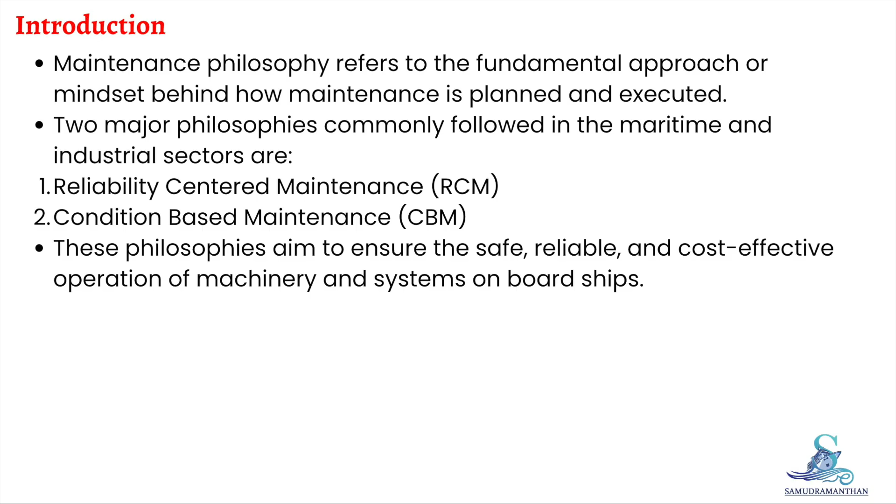In today's lecture, we will discuss two fundamental philosophies of maintenance: reliability centered maintenance, commonly known as RCM, and condition based maintenance or CBM. These two approaches form the backbone of modern maintenance strategies, especially in industries like marine engineering, where reliability and safety are absolutely critical. Let us begin by understanding what each of these philosophies mean and how they are applied in real world situations. Reliability centered maintenance.

Now, the philosophy of reliability centered maintenance or RCM was developed to ensure that maintenance decisions are made logically and systematically, focusing on the functions that equipment must perform rather than on the components themselves. RCM aims to achieve one major objective: to increase the probability that a machine or component will function reliably throughout its design life with minimum cost and maintenance effort.

The philosophy became especially important after catastrophic industrial incidents such as the Amoco Cadiz oil spill and the Piper Alpha explosion, which highlighted the need for comprehensive and effective maintenance systems. The core concept of RCM.

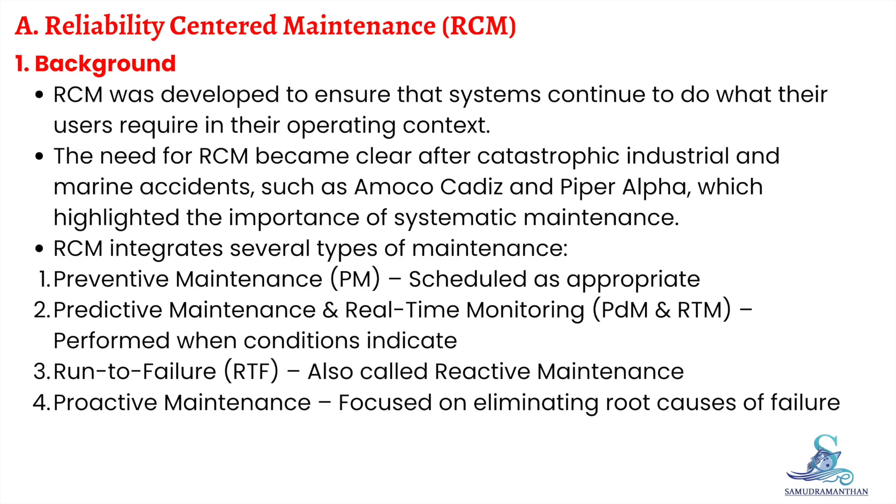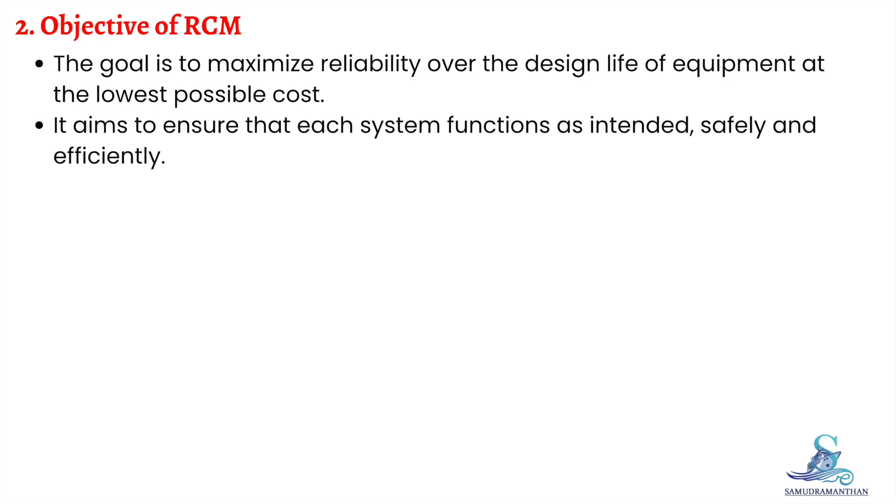RCM combines multiple maintenance techniques: preventive maintenance done at scheduled intervals, predictive maintenance and real-time monitoring performed when the equipment's condition indicates it's necessary, run to failure, also known as reactive maintenance, and proactive maintenance, which aims to prevent failures at root cause. So, RCM is not a single method, it's an integrated philosophy that uses different maintenance approaches intelligently based on the system's reliability requirements.

Key features of reliability centered maintenance. Let's now discuss the main principles that define RCM. Focuses on the function of the system. RCM aims to preserve the function of a system rather than just its parts. For example, on a ship, if a function is critical, such as propulsion or steering, redundancy is often built in. Multiple systems may be provided to perform the same function to ensure operational safety.

This aligns with the IMO ISM Code paragraph 10.3, which requires companies to identify critical equipment whose sudden failure could lead to hazardous situations. These systems must be regularly tested and maintained to promote reliability.

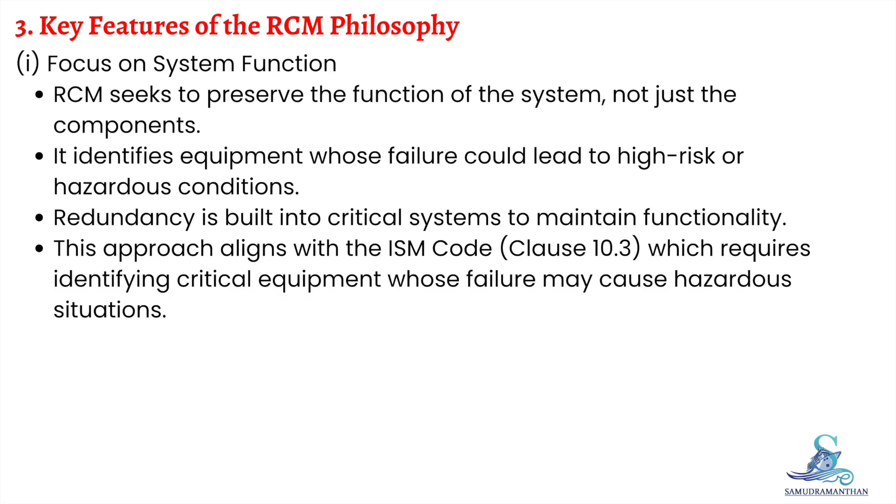It is reliability centered. RCM focuses on statistical data, analyzing failure trends over time. It does not worry about simple, low risk failures but rather concentrates on those that could cause major disruptions, safety risk, or economic loss. It determines maintenance intervals and tasks based on failure probability and risk assessment.

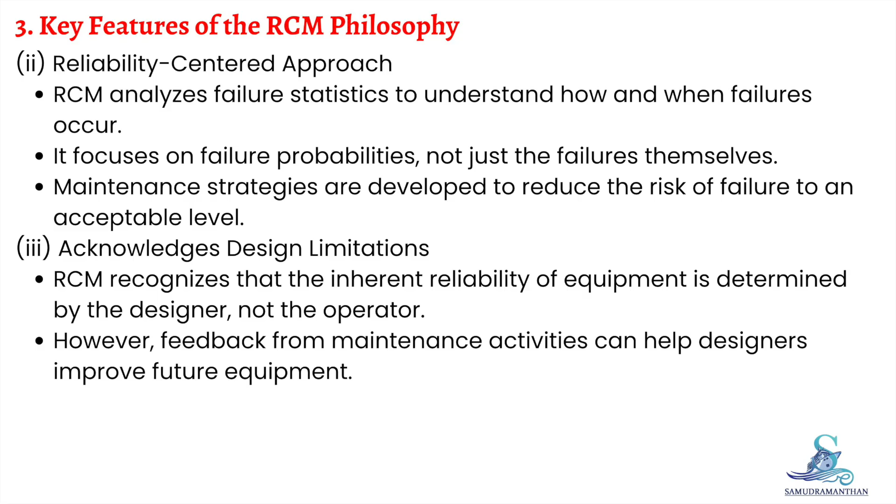Acknowledges design limitation. RCM recognizes that design determines inherent reliability. Operators and maintenance staff can't change a poor design, but they can provide valuable feedback to designers for improvement. So it builds a feedback loop between maintenance and design.

Driven by safety and economics. Safety always comes first in RCM, even before cost. Once safety is ensured, maintenance strategies are optimized to be cost effective. This balance makes RCM both practical and efficient.

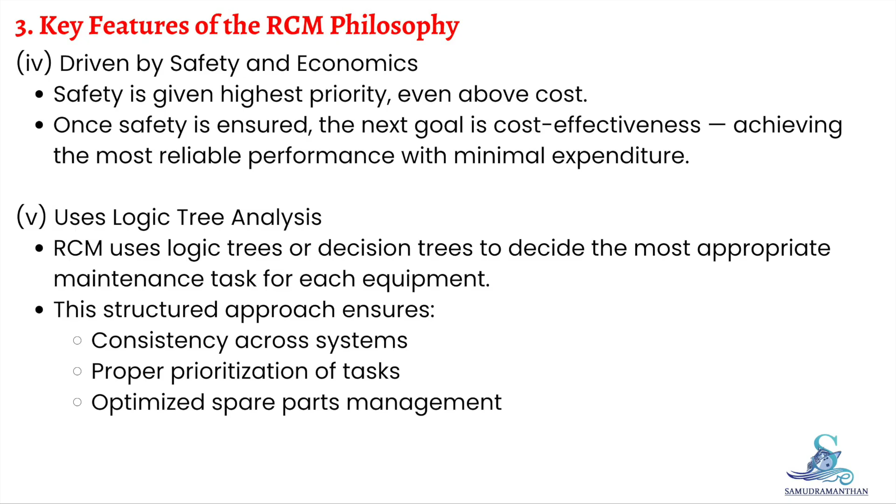Uses a logic tree for maintenance decisions. RCM employs a structured logic tree, a decision making process that helps determine what kind of maintenance is necessary for each piece of equipment. Through this process, spare part requirements, inspection intervals, and task responsibilities are all clearly defined and justified. RCM is based on certain key principles.

To summarize, reliability centered maintenance is based on these key ideas. The consequence of failure is more critical than the failure itself. For example, if a failure could lead to loss of life, environmental damage, or major financial loss, then the maintenance plan must eliminate the chance of such failure completely.

Critical systems and components must have planned maintenance tasks that reduce the probability of unanticipated failures to almost zero. When designing maintenance plans, the total failure cost, including downtime, labor, and material cost, must be compared to the planned maintenance cost and the cheaper, safer option must be selected.

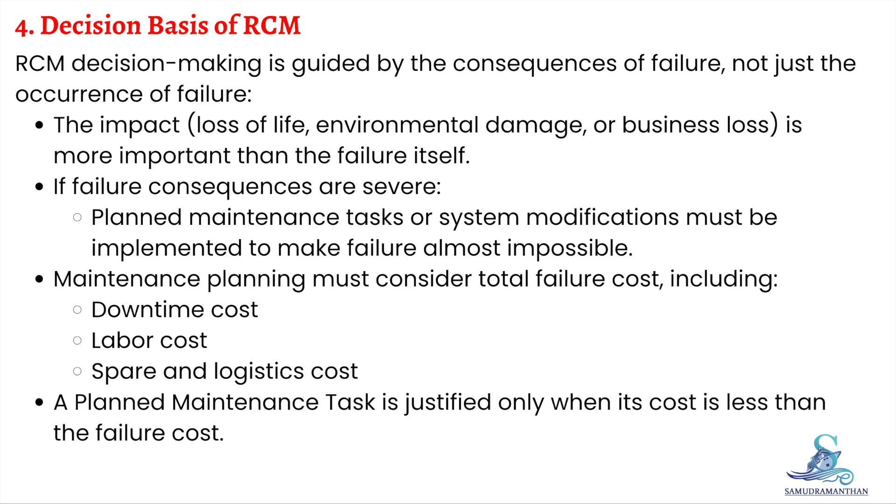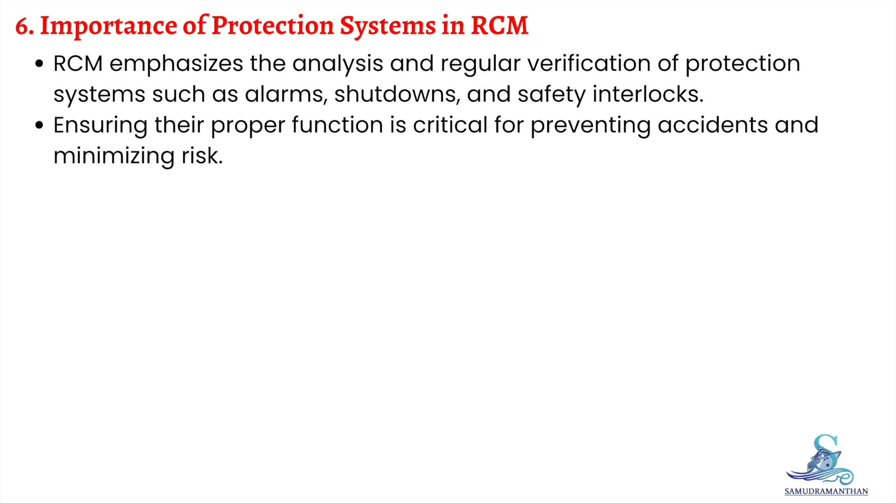RCM involves a structured process of thinking about equipment and system behavior. Regular analysis and verification of protection systems such as alarms, shutdown systems, and emergency backup is a vital part of RCM. To apply RCM effectively, we ask a logical series of questions. What is the function of the equipment or system? What can cause it to fail to perform this function?

What happens when each type of failure occurs? What are the consequences of each failure? How can each failure be predicted or prevented? And finally, what action should we take if a proactive task cannot be identified?

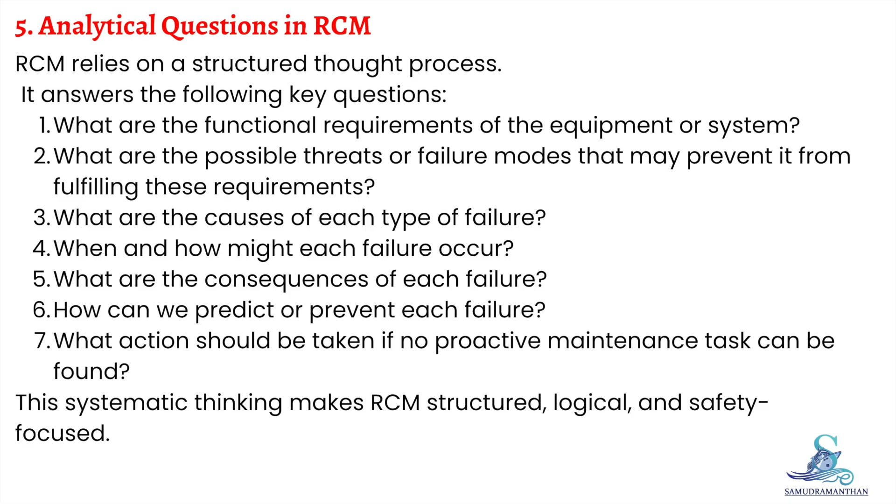Condition based maintenance. Now let's move to the second philosophy, condition based maintenance or CBM. Unlike RCM, CBM is somewhat less comprehensive. It focuses mainly on monitoring the condition of running machinery. In CBM, we regularly measure significant parameters such as vibration levels, temperature, pressure, oil analysis results, and so on.

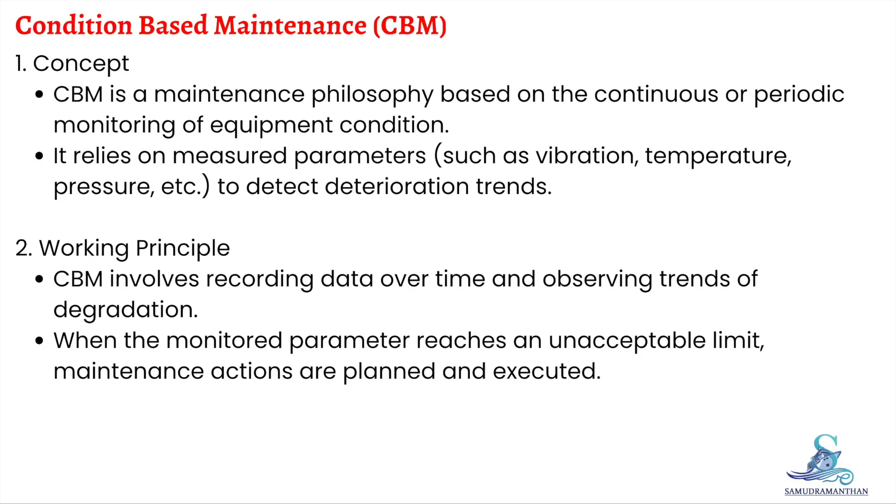These measurements are recorded periodically. When plotted together, they form a trend, showing how the equipment is deteriorating over time. Once these trends indicate that the condition has reached an unacceptable limit, maintenance action is scheduled.

Advantages of CBM. The biggest advantage of CBM is that it gives advance warning of failure. It allows the operator to plan repairs in advance, order spares ahead of time, arrange skilled manpower, and schedule downtime efficiently. This means maintenance can be done only when necessary, not too early and not too late.

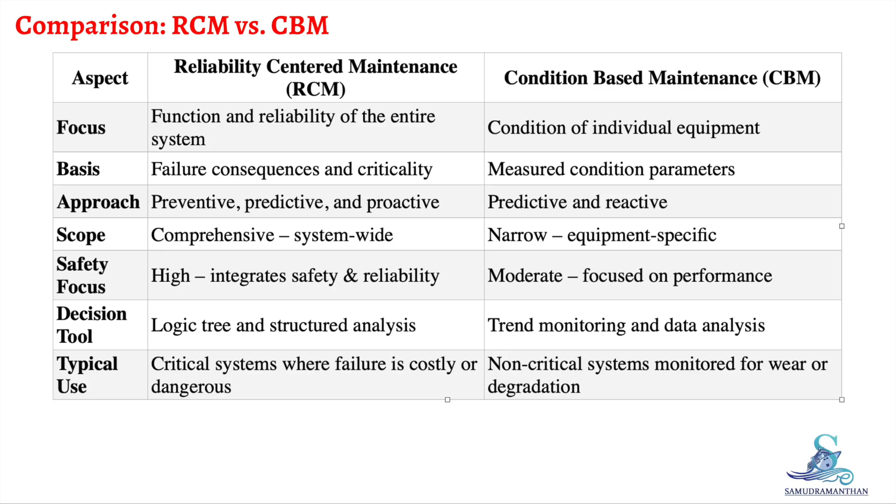Comparison between RCM and CBM. To summarize the difference, RCM is a comprehensive philosophy that integrates multiple maintenance types based on reliability and consequence of failure. CBM, on the other hand, is data driven. It focuses on the condition of the equipment to decide when maintenance is required. In essence, RCM determines what maintenance to do while CBM helps determine when to do it.

So, to conclude today's lecture, both reliability centered maintenance and condition based maintenance are essential maintenance philosophies that help engineers achieve maximum equipment uptime, safety, and cost effectiveness. In marine engineering, where machinery operates continuously under demanding conditions, understanding and applying these philosophies correctly ensures safe and efficient ship operation.